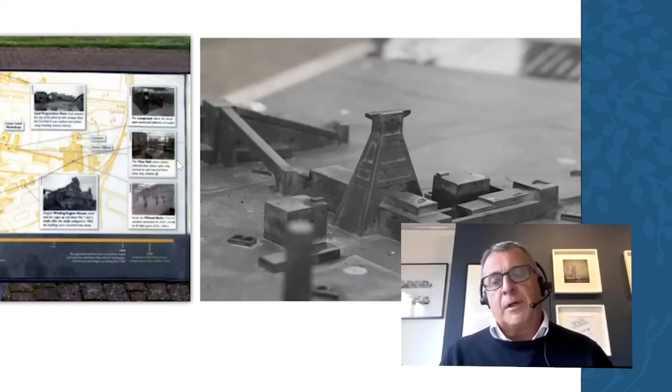Equally, as everybody's articulated, the coal A-frame that exists as part of the heritage of the site is a significant marker and icon. And that image on the right-hand side of the previous model actually implies a few things to us about a sense of order, a sense of priority, a sense of a priori, if you will. This site is not tabula rasa, it's not a blank sheet of canvas. It actually requires a response that's grounded in that history and heritage. And we think that's critical.

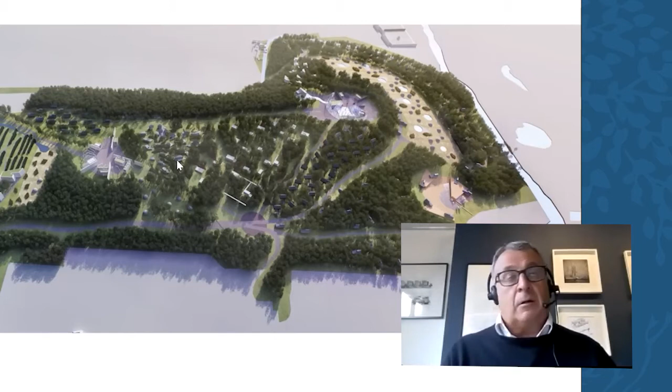So, what does all that mean? Well, as I mentioned, the site is organised into a series of zones and special places that are part of the existing condition, part of some of those things as found. It's a master plan that we would describe as episodic, a series of episodes of events that align themselves along specific routes that make the place legible, but also make it very special, very unique. I'll take you through the plan organisation.

Now, as some of you will know, there's a pretty brutal looking industrial unit on the opposite side of the road that's got a chimney. That has a positive effect in terms of energy, but a detrimental effect in terms of what the environment feels like. So our first kind of visual clues and devices detach us from that particular world. So we move away from the road and that particular industrial unit.

Can everybody see my cursor? Yep, I can see it.

Good. So the idea is that the point of entrance to the Barony makes this place special. So we pull that as far along the site as possible. And then we use this traditional architectural device, planning device, if you will, of the country estate road, which actually wraps all the way around the outside of the A-frame, which sits in the middle of what Andy called gardens. I call it a bit of scrubland, but we can elaborate on that later. So that processional route around the A-frame gives that sense of arrival, that sense of purpose.

And the arrival point is a collection of pavilions that are contained by this big service wall that's conceived in black limestone, effectively as a gabion basket wall. Now, this building acts as a threshold from one world into another. So it acts as a screen, it acts as that point of departure where you move from one space to another.

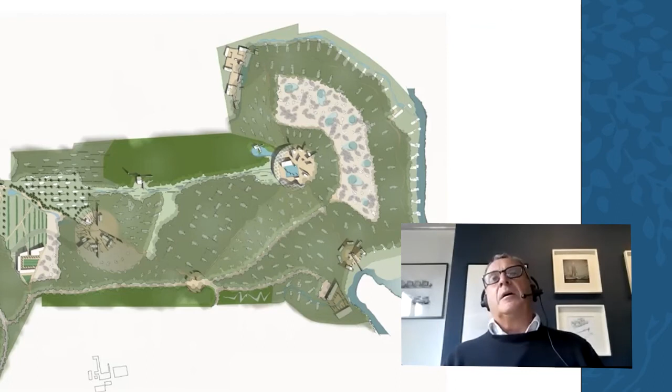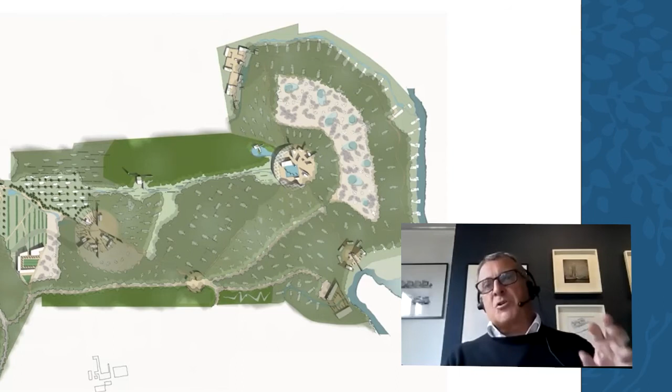There's also then a new spa facility that will sit right on the Lugar Water, and we draw part of the water in to make that relaxing, quintessentially kind of Zen environment that makes for a special place. The idea at the moment is that this is bespoke to residents, whereas there will be an additional spa and therapy rooms as part of the reception building that will be open to day visitors. And then, as you can see, various tree houses, geodesic domes, and lodges form very different character areas, and that's important across a site that's so broad and vast, that actually makes special places and responds to the specific nature of both the topography and the landscape as we move around.

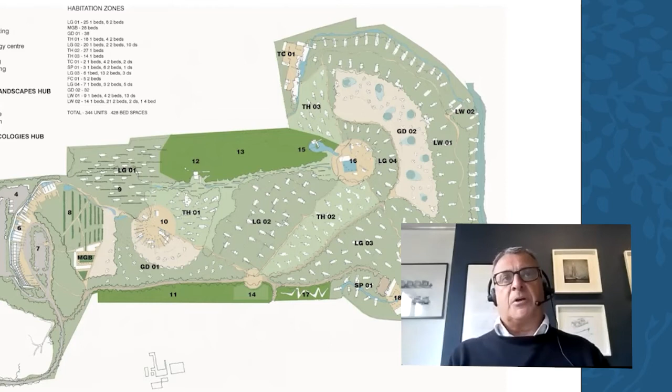I'm not going to bore you with this plan, but what this demonstrates is the development. We get 344 units. Sorry about that, Stephen. We're 6 short of your target of 350. But it's conceptually correct, we think, at the moment. This generates just shy of 30,000 square meters of accommodation across the site. And what this does facilitate is a phased development. So in terms of investment pattern, but also in terms of a strategic master plan that might take a number of years to be built out, that kind of framework of development facilitates changes in marketplace, changes in accommodation, and allows us to respond to those things.

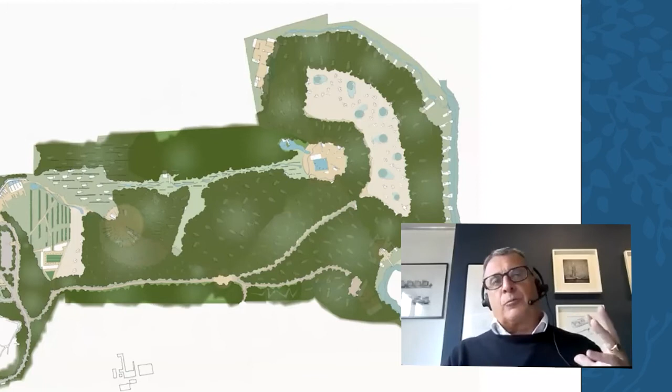What is really critical, though, is that that's the current tree coverage across the site. So actually, very little of the built environment is seen. It's really secluded. It's really unique. It's really part of a special environment that we think is cool. So the architecture is unashamedly contemporary, but it's still grounded in some of those geometric propositions that were part of the A-frame, part of the organisation of the site, as well as evoking some of the memory of Scottish heritage and Scottish architecture.

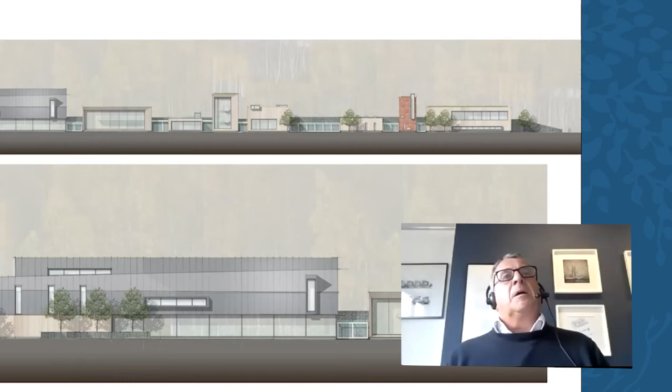So the principal reception building here, which will have opportunities for conference facilities, a visitor and reception facility. The visitor facility will talk about the site, talk about the A-frame, bars, restaurants, stacked accommodation. So we have this really nice idea that because this sits almost at the top of the site, but not quite, we can take some of the spa rooms up to the 3rd level so that you can view out over the hills, which is just a breathtaking view from that part. And then pool and big gym and dance studio at the end.

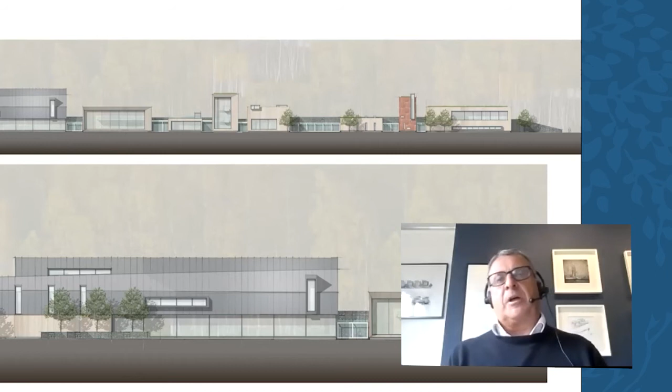This is kind of unfolded to make it more legible. Materials are all grounded in that response to natural environment. So zinc, timber, Corten, which is rusty steel. We use Corten specifically because of Munsell's colour theory: green landscape, the opposite of green is red. So these little red accents, these little moments, act as points of legibility and orientation as we move around the site. And we think that the composition is entirely appropriate.

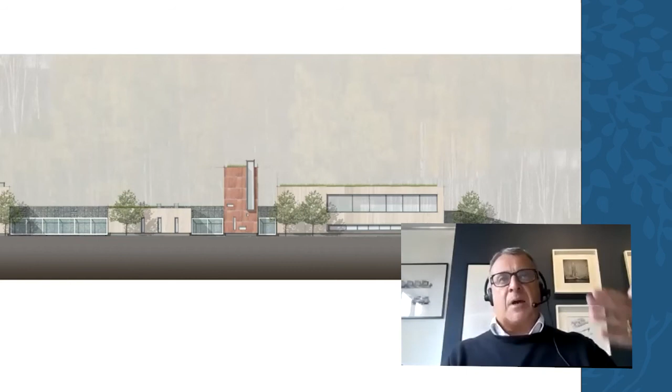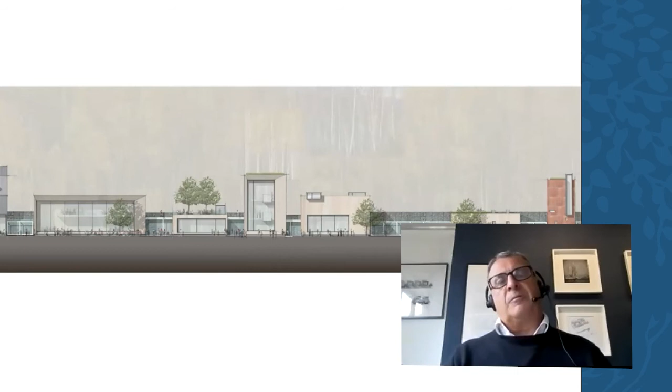And there you can see that big black gabion basket wall that acts to distribute services, acts as that threshold, that demarcation from one type of world to the other. And then you can see that there are opportunities for green roofs, PV roofs. Even the buildings themselves can be CLT and timber frame. So we may not have to use concrete, other than where we need to, for embodied energy on the site. So it becomes incredibly carbon neutral. In fact, we plan to make it carbon positive.

So you can see here, there's the embrace of the welcome and the arrival sequence. We like to talk about architectural attitudes, what our attitude is to the architecture and the site. And these sketches talk about the tree houses. Now, the tree houses afford us to bring a little bit more density in here, because as you can see on the drawing on the left, they can sit in various parts of the section of the site. So you can get people close together because they either look below one another or above one another, but they also give an entirely different experience of the site too.

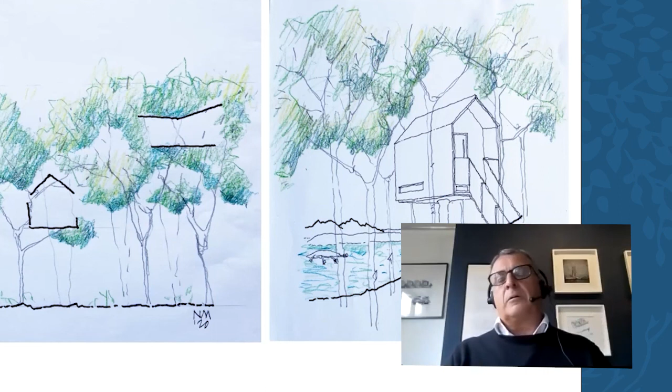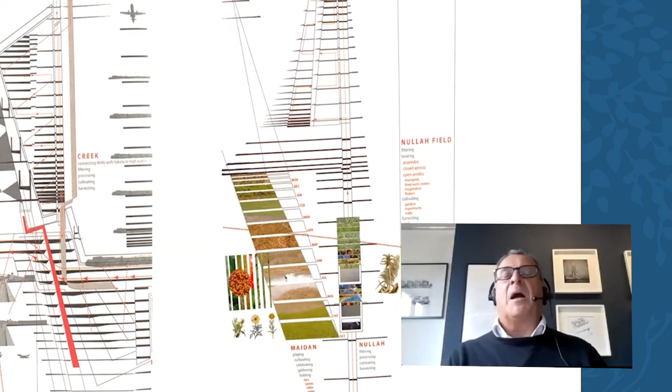These are diagrams that we look at that talk about that idea of projective ecologies, how we can take ecologies even from the airport, even from that point of arrival, onto the master plan and then map them out. And then the productive landscapes is about buildings that generate all sorts of opportunities. So, you know, there are organisations in Scotland that create jewellery from heather. Why can't we do that? There are organisations that take heather and turn it into gin. Why can't we do that? So that all generates this idea of a circular economy that sits within the site, but becomes very special, and it becomes very purposeful and meaningful, not only to the visitor, but to the local community as well.

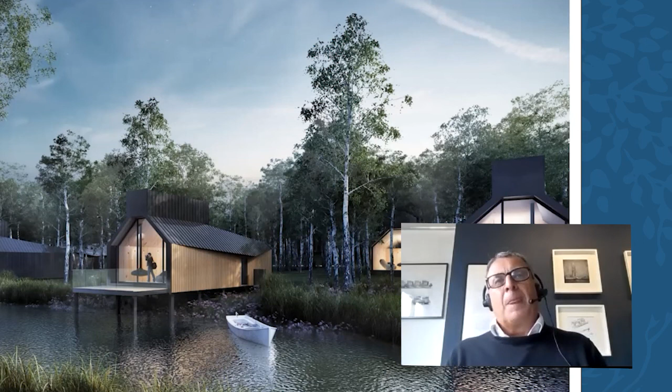And they're kind of organic in their architectural expression. So they look like pieces of coal or anthracite. You know, the frames look like fossils. They all talk about this special genius loci. And that's enough of me going on.